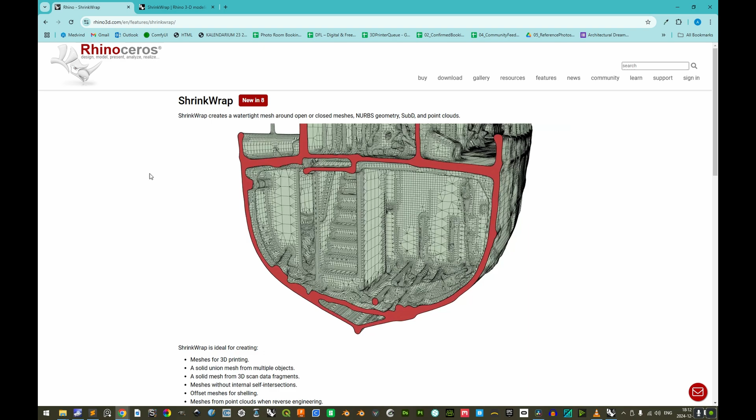Welcome. ShrinkWrap is a command in Rhino 8 that makes watertight meshes from open or closed geometry. As such, it is perfect to solve your assignment, where you in a previous segment have authored models consisting of separate surfaces with different colors.

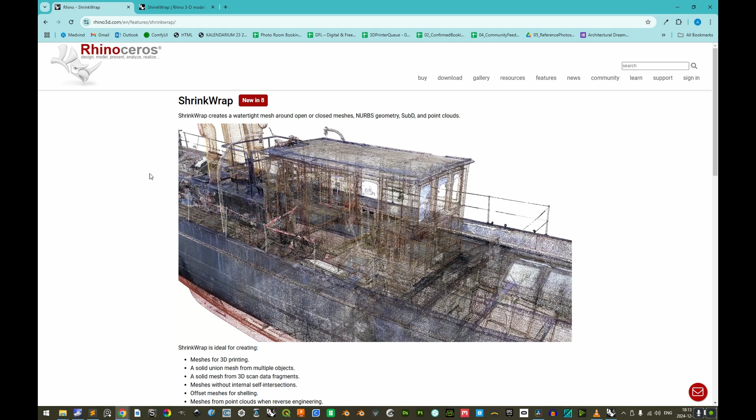For 3D printing these objects, no color will be retained, so the different layers and different colors of the different surfaces are of no matter. But to create a 3D printable solid object from the end result of the previous assignment is a very gruesome matter if you do it manually.

With ShrinkWrap, you can do it almost automatically. The caveat is that you get a mesh, and the density of the mesh might be excessive, and the file size of the exported STL too much for the slicing software to handle.

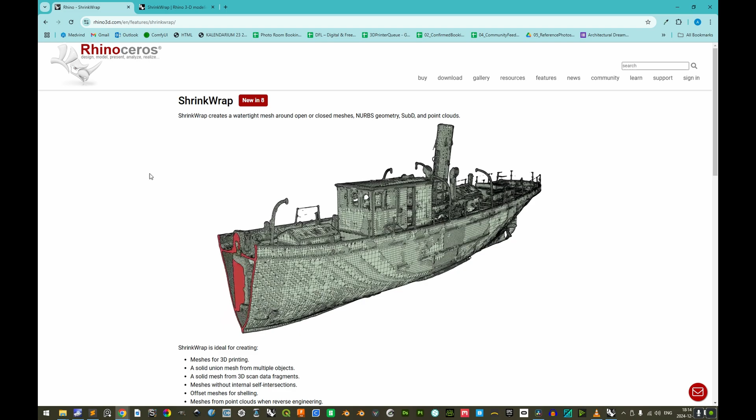So this tutorial will also cover how you in MeshLab reduce the complexity of the mesh. Both Rhino 8 and MeshLab are installed in CAD Lab in the computer room, so you are able to work with it there if you do not have access to Rhino 8 personally, like me.

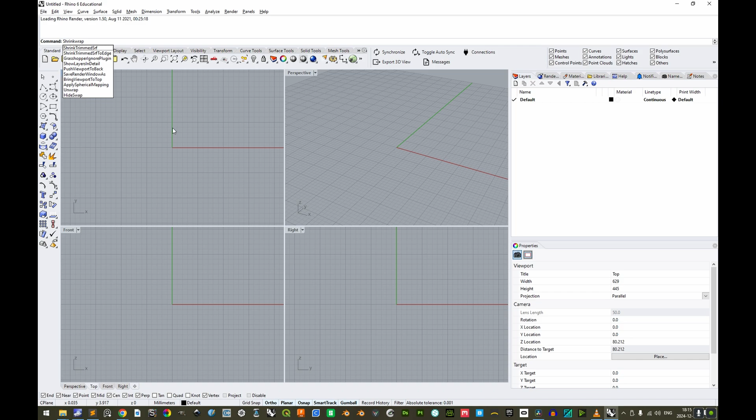For specific help about ShrinkWrap as a command, you'll find the McNeel Rhino 8 documentation most sufficient. If you try to access ShrinkWrap from an earlier version than Rhino 8, you will see that there is no such command. So this tutorial was prepared in almost its entirety in CAD Lab when no microphone was present, so you'll have to bear with that the quality is subpar. Still, the tutorial's purpose is to help you complete this assignment in a more efficient way than manual modeling.

Now let's start the tutorial. Import a Rhino file from the previous course segment into a new blank Rhino document. If there are missing fonts, ignore this. If there are missing textures or image files, remove these, since the 3D printed result will not be textured or colored.

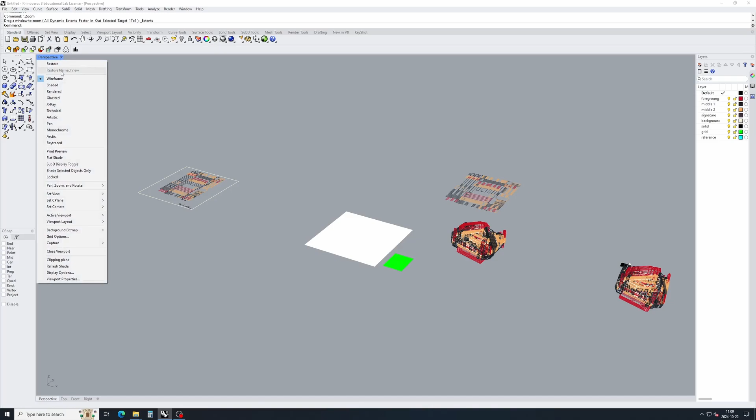Enter the command ZE to zoom to extents. Change the viewport display mode to shaded to more properly see what surfaces there are. Select everything that is not a surface and delete this.

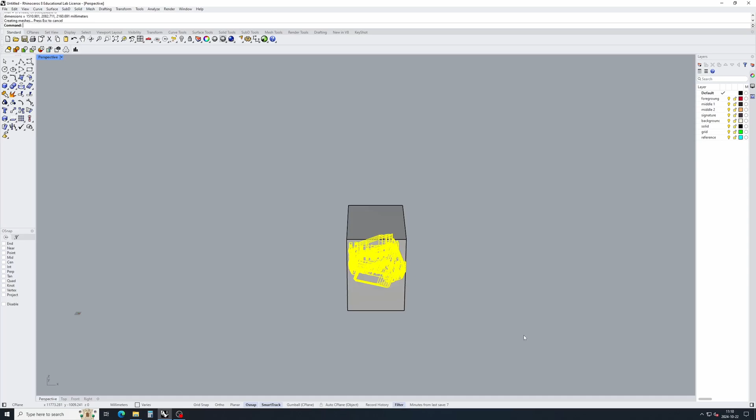If you for any reason have multiple copies of the geometry that you want to 3D print, evaluate which one you want to 3D print. Delete any superfluous geometry. Create a bounding box to easily move the objects from any bottom corner of the bounding box to the origin.

To do this, you must first enable OSnap and also any relevant end snap point. Use M to move and 0 as the destination point.

Find a suitable corner that you can rotate your object around so that you get a perfectly flat bottom surface. Without a flat bottom surface, the object will not adhere to the 3D printer's workbed.

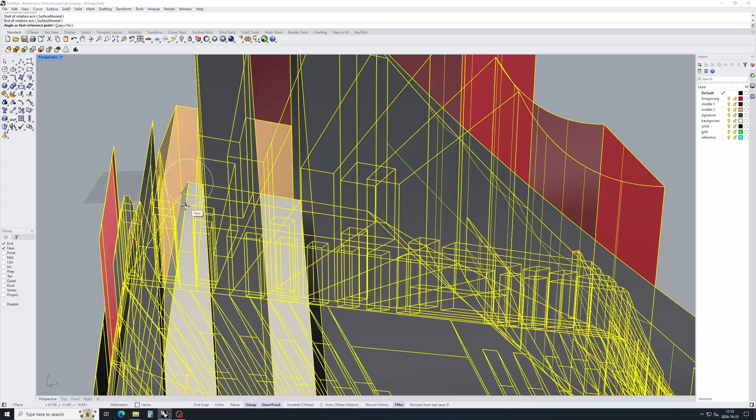Use the command rotate 3D to rotate around first one axis and then the other edge of the corner to get a perfectly horizontal bottom.

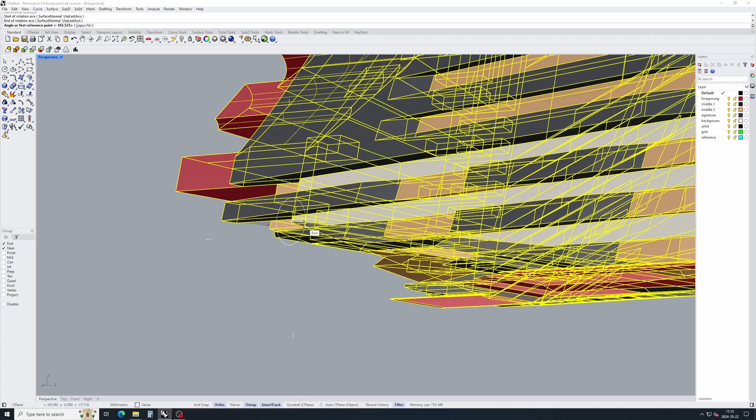The command rotate 3D might seem a little finicky at first, but first you define with 2 points the rotational axis around which the object will rotate, and then you define the angle. If you have ortho snapping active, it will be easy because it snaps to 90-degree angle increments.

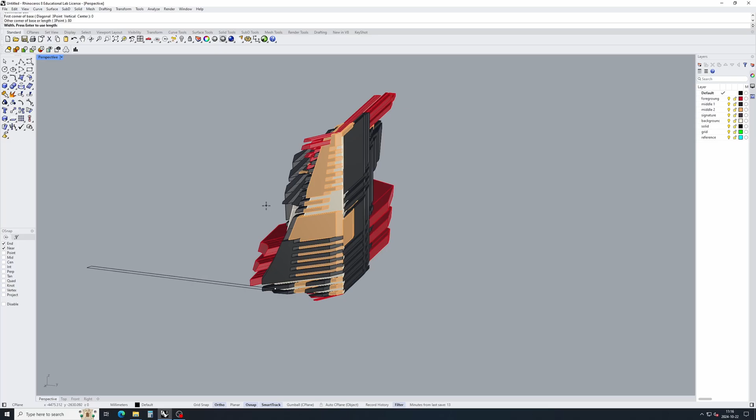With the model correctly rotated, let's make another bounding box to see the dimensions of it. This far exceeds the reasonable size to 3D print, so let's downsize this. Let's make a box with the length and width of 40 mm and the height of 60 mm.

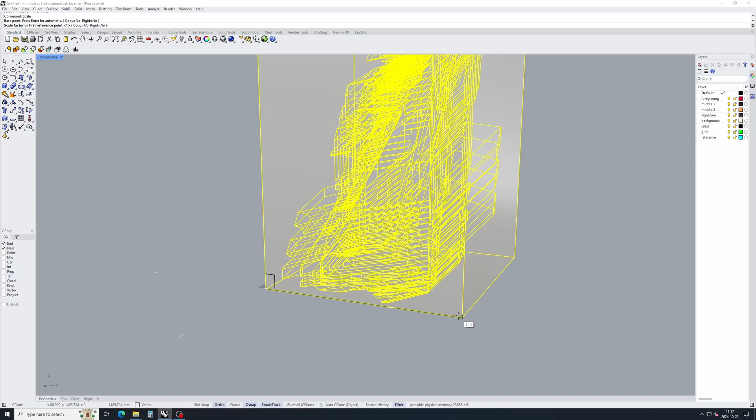Let's select everything except the box that we recently created. Make a bounding box for reference for the scaling. Add the bounding box to the selection by shift-clicking and move its corner to the scaling box corner. Use the command scale to scale down the selected geometry down to the reference scaling box.

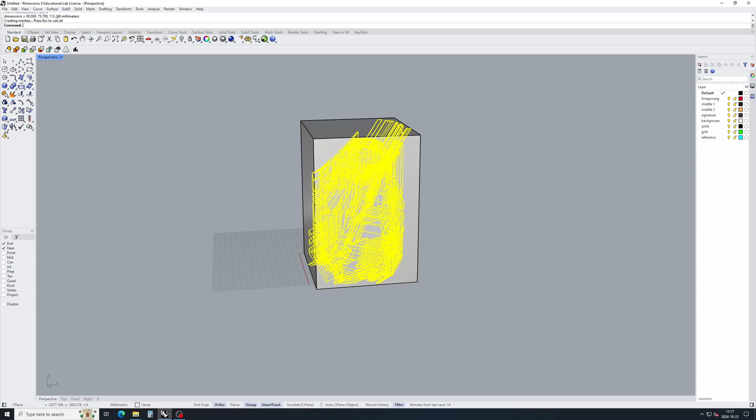If you find that the model still is too large with regards to any other axis, then repeat the scaling command for that axis as well. Delete both the scaling reference box and the original bounding box. Create yet another bounding box just to make sure that the dimensions are within the boundaries, 40 by 40 by 60.

Ignoring the mesh on the right and creating a box that exceeds the width and the length of the model,

Position this box so that you may use it as a splitting object, so as to make sure that the 3D printed model gets a completely flat bottom surface.

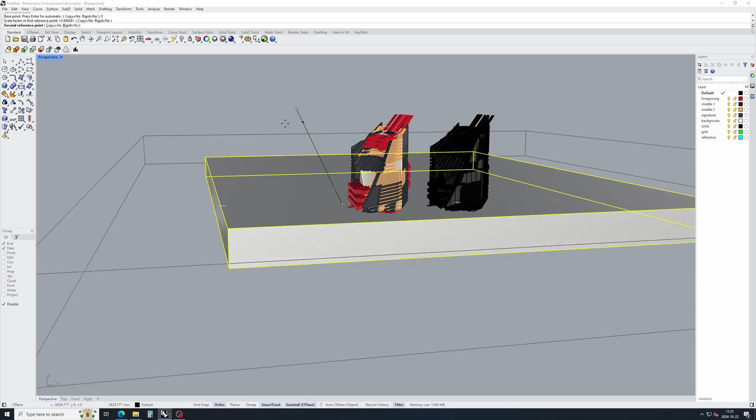With gumball active, it is easy to reposition this box so as to make adequate splitting geometry. With the move command, use V for vertical to lock the movement in the said vertical axis as a constraint.

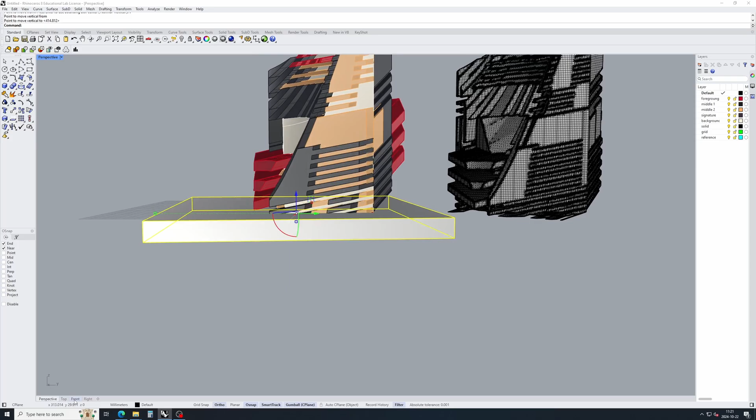To verify that the vertical position of the splitting object is adequately placed, you may go to the front or right viewport and verify so.

Select the adequately positioned box to be used as a splitting object and use the command trim to trim all of the surfaces which are at least partly below the top surface of the splitting box.

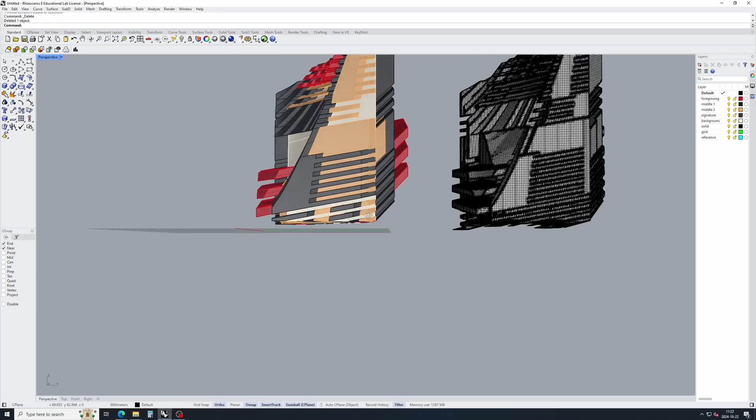In the perspective viewport, delete the splitting box and verify that everything looks as you intend, horizontal and flat on the bottom of the object.

With the bottom flattened, make sure, with the bounding box yet again, that the bottom corner point is situated at the Z0. Move it, constrained to the vertical axis, to the origin.

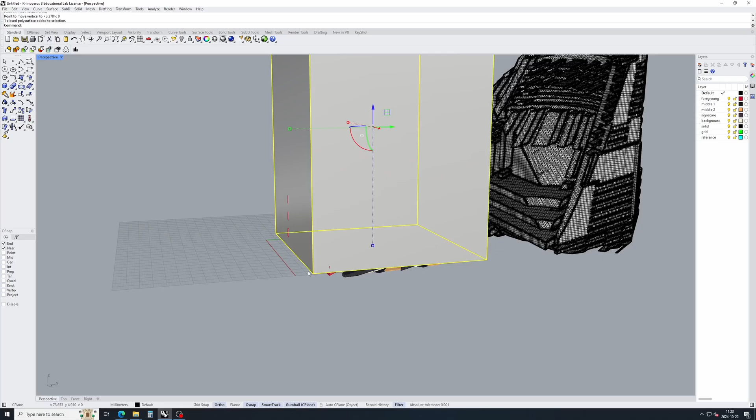You may once again delete the bounding box. Ignoring the mesh on the right as well, select your objects and enter the command ShrinkWrap.

You may enter the parameter values as you see them here, or experiment as you see fit. The ShrinkWrap command will take some time. Be patient. A minute or so later, this specific ShrinkWrap is complete.

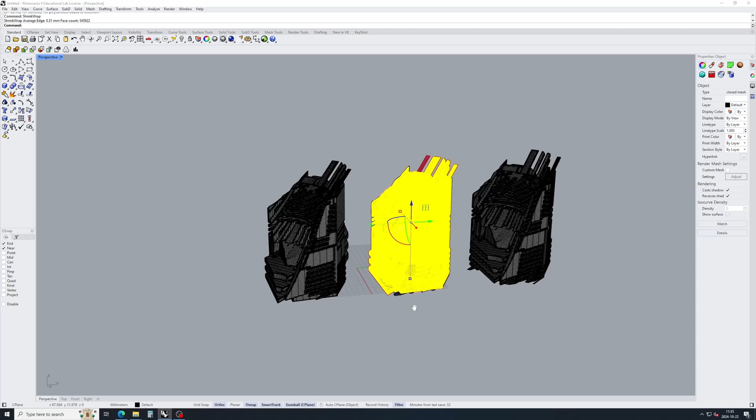With the gumball, you may move it temporarily out of the origin so as to see it more properly, and you can change the display mode to Arctic.

Instead of 100 non-printable separate surfaces, the shrink-wrapped mesh is one solid hull and can be 3D printable.

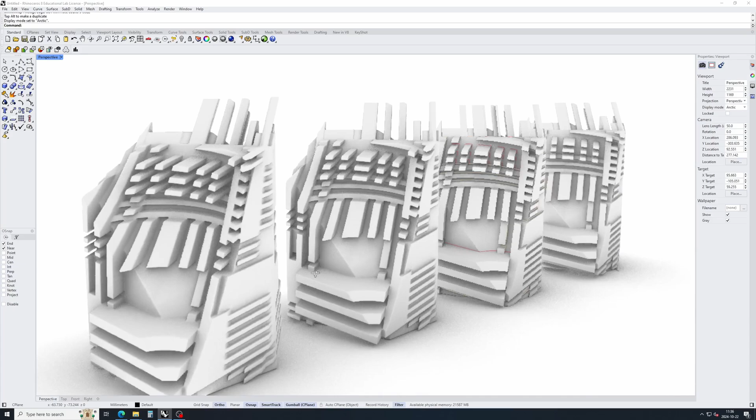However, at this stage, the mesh is very, very dense, and the high density together with a large file size may crash the slicing software. So there's good reason to try to reduce this in a separate software. We'll show this soon enough.

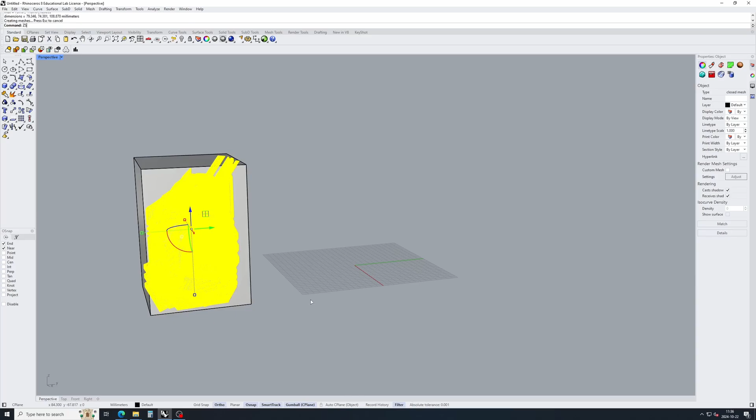As for now, if you are working in a separate document with your original geometry saved somewhere, you may delete everything else than the 3D printed object or the object to be 3D printed, make a bounding box and move it to the origin. Very good.

Select the shrink wrap mesh and type the command export. Make sure to export as an STL file. Binary is best for the file size. It might take some time for the exporting of the mesh.

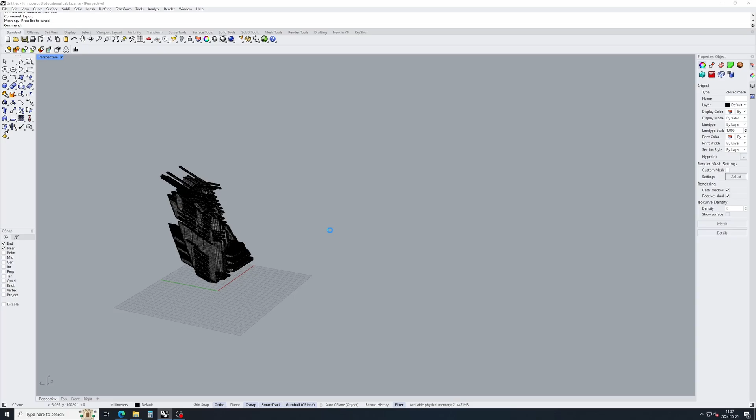With the model exported, navigate in File Explorer to where you exported the file and open the program MeshLab. If the file type STL is associated to MeshLab, then you may double-click the file itself. Otherwise, hit the Windows key and type MeshLab.

You may keep the opening settings as default. Hit OK. You may orbit around the object by dragging the axis here. But the main thing that we're going to do is go to Filters, Remeshing, Simplification and Reconstruction, and then to Simplification, Quadric Edge Collapse Decimation.

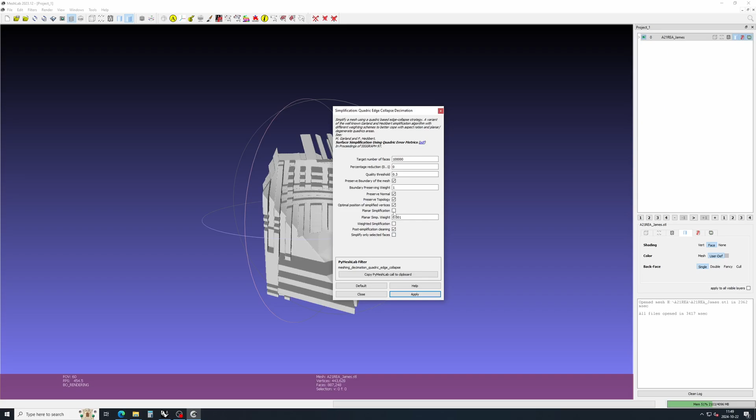You may enter the parameter settings as you see here, or experiment as you see fit. The important thing here is that we want to reduce the file size for the STL so that the 3D printing slicing software does not crash when slicing. Hit apply when you are ready to initiate the remeshing.

There will be a progress bar in the bottom center showing you how the progress goes. When the process is complete, you may click close to close the dialog window. You also see this in the log to the lower right that the filter has been applied.

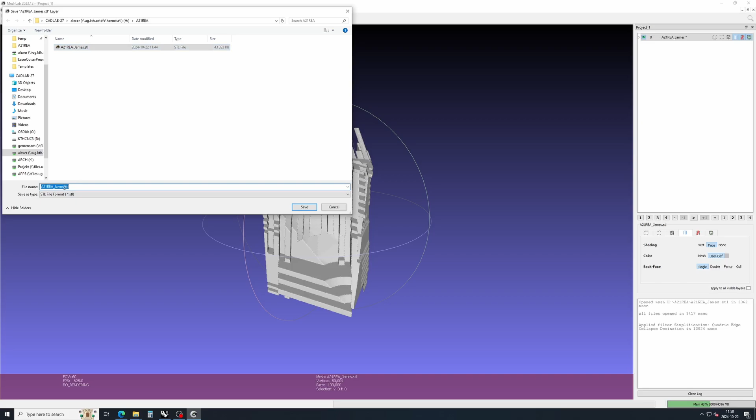To save, go to File and export mesh as. So as not to overwrite the original file, you may choose any variation that you see fit. Use the default settings to save the file. When the file has been saved, you may navigate in File Explorer to your saved file.

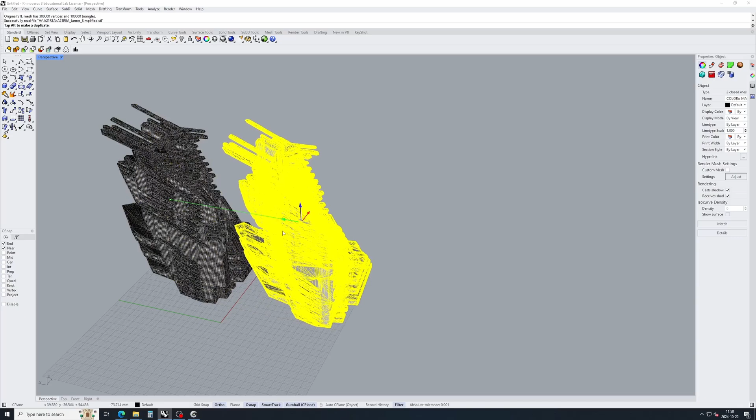Make sure that you have Rhino active and click and drag the file into the Rhino viewport. Choose the option Import File. The default settings are fine. If we move the object with the gumball, we can more properly compare it with the original.

And we see here that the density of the mesh is much less, but it also has one artifact. It says here that there are 2 meshes, so we'll need to find the stray separate mesh and delete this.

Thus, we have now one mesh that is a simplified version of the original and is much more reasonable to 3D print without crashing the slicing software.

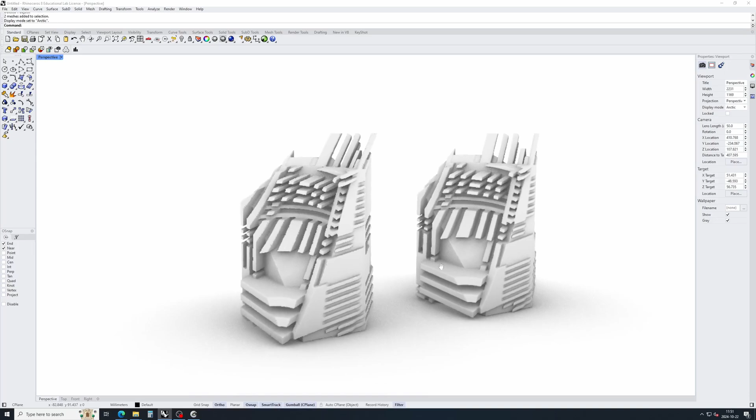We may verify that these are similar to the extent of being non-discernible if we go to the Arctic display mode and verify this. One always has to take into account the scale that you actually 3D print in. In this very small scale, details that may have been lost from the left mesh to the right mesh would still not have been visible.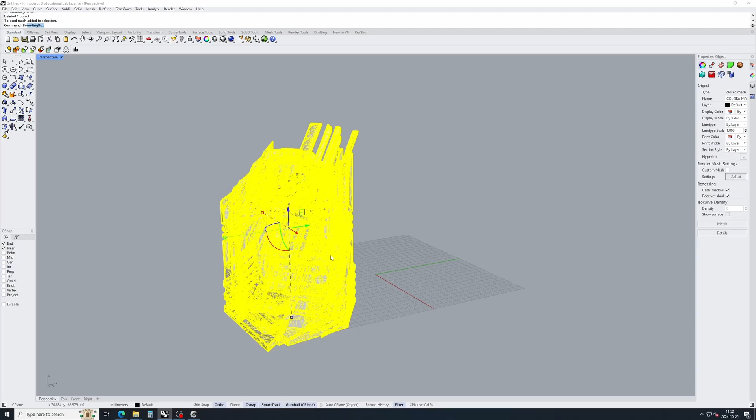Delete the high density mesh, and with the bounding box make sure to move the low density mesh from a bottom corner to the origin. Delete the bounding box, select your objects and export.

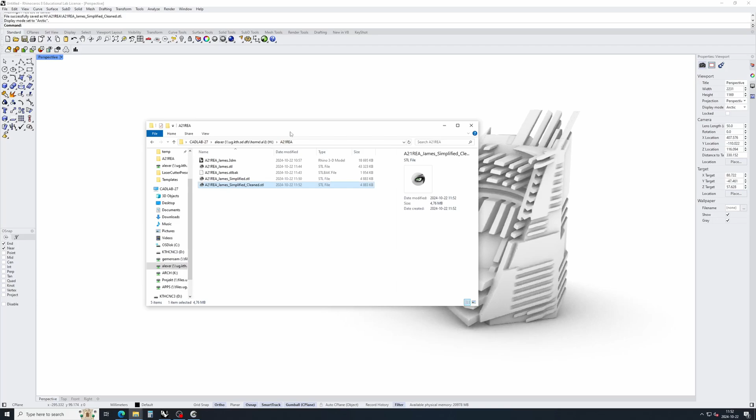For the course delivery, make sure that the file name is as specified in a separate instruction. Binary is good. Click OK to export the object. As you see, the file size is much more reasonable than the original.